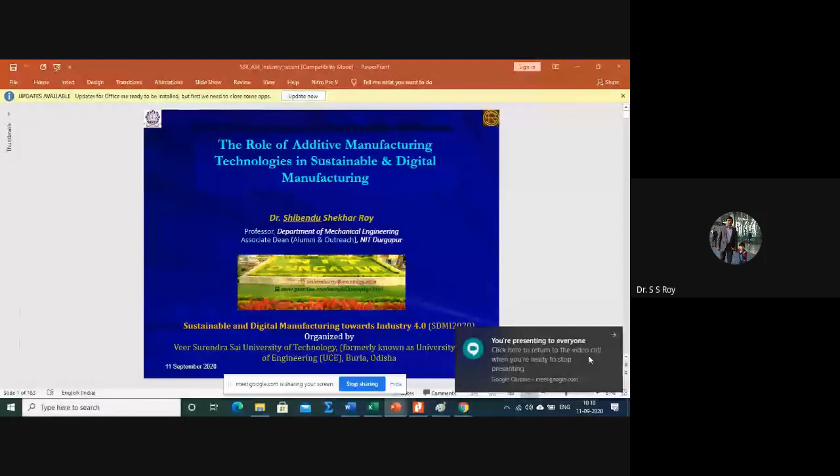I'd like to talk about the role of additive manufacturing technologies in sustainable and digital manufacturing in the area of Industry 4.0. As you know, the theme of this seminar is sustainable and digital manufacturing towards Industry 4.0, so I've structured my talk along this line, though I already know Professor S.K. Pal, who is also my teacher.

He already covered Industry 4.0 - what it is, why it is required, and what the challenges are. I'll just recapitulate that part, followed by what sustainable manufacturing is and what features sustainable manufacturing should have.

Then I'd like to talk about digital manufacturing, which was also covered by Mr. Mukesh in yesterday's afternoon session. My focus is on additive manufacturing - what role it plays in the arena of sustainable manufacturing as well as digital manufacturing.

We'll talk about what the technologies are, and more focus I'd like to give on some case studies and the research opportunities in this particular area.

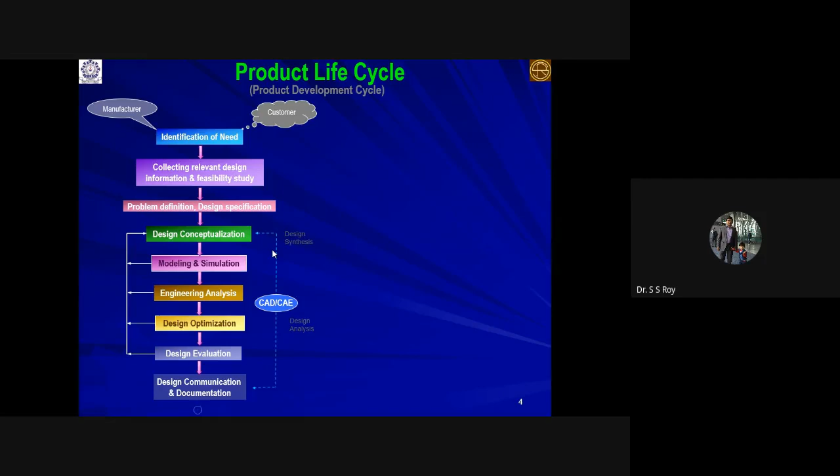Then design documentation. Once the design is over, we go for planning for manufacturing - process planning, capacity planning, manpower planning, material planning, and, important in the last 20-30 years, tool design. All these things have to be carried out.

After that, we go for the actual manufacturing. Once it has been manufactured, we go for testing, quality control, packaging, shipping, sales service, and after-sale service. So this, in a nutshell, is the product life cycle or product development cycle.

Now I'd like to emphasize that in each and every activity there is involvement of man, machine, and material.

As there is involvement of man, machine, and material, ultimately there is involvement of cost, whether it is manpower cost, machine cost, or material cost. Also, there is a time requirement for each and every activity. So the two critical factors are time as well as cost, though they are sometimes interrelated.

Now if you see any product development organization, they are facing some challenges. Even in the pre-COVID situation as well as the post-COVID situation, the challenge is we have to develop our product with the shortest possible time, with the lowest possible cost, but keeping quality as high as possible. It should be competitive from a quality point of view.

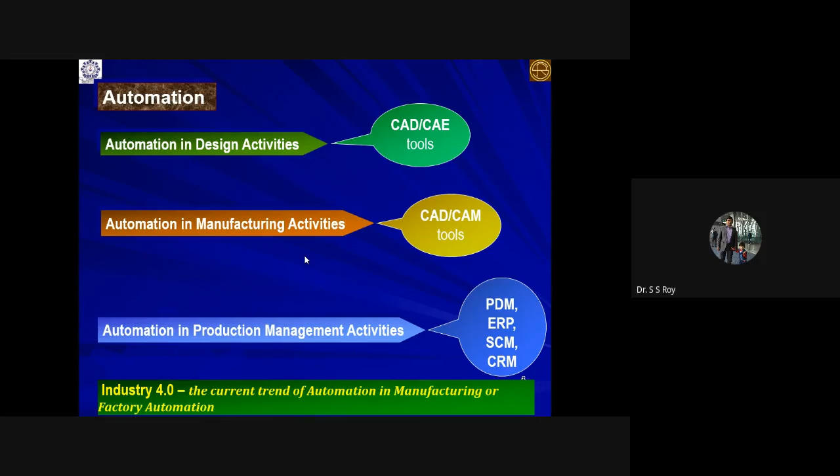And that is why, to make the factory much smarter than before, the current trend of automation in manufacturing has been coined as Industry 4.0. Now, as Professor Pal mentioned, if you see the industrial revolution, it starts with Industry 1.0, Industry 2.0, Industry 3.0, and so on.

I would like to show you the brief history of Industry 4.0. But before that, I would like to show you, in the current context, what Industry 4.0 is doing and what different technologies are used in Industry 4.0. So I'd like to show you this video. Please bear with me and listen carefully.

Here, the machine and product communicate with each other in the modern industry.

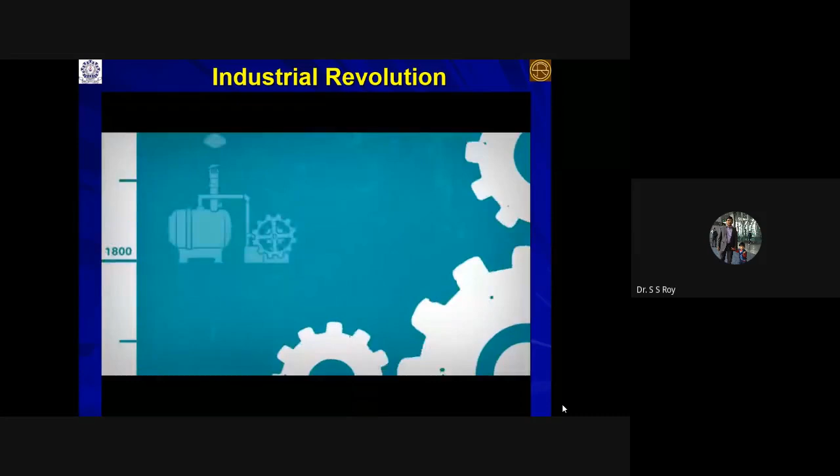So this is the history of the industrial revolution.

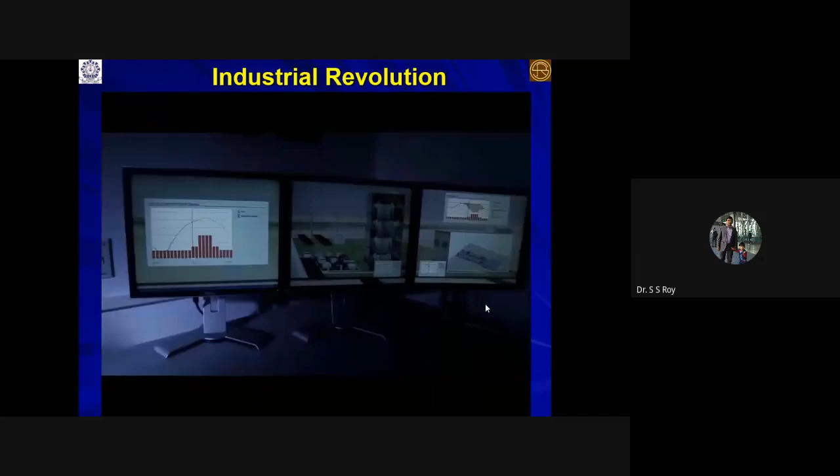So this is the way industry is moving. And as you know, the term Industry 4.0 was coined by the German government in the year 2011.

It is also known in the USA by the name smart factory. The German term refers to the trends of automation and data exchange in manufacturing, and the same thing is coined in the USA as a smart factory, which includes cyber physical systems, IoT, and cloud computing to make factories smarter than before.

So I would like to show you another view of that.

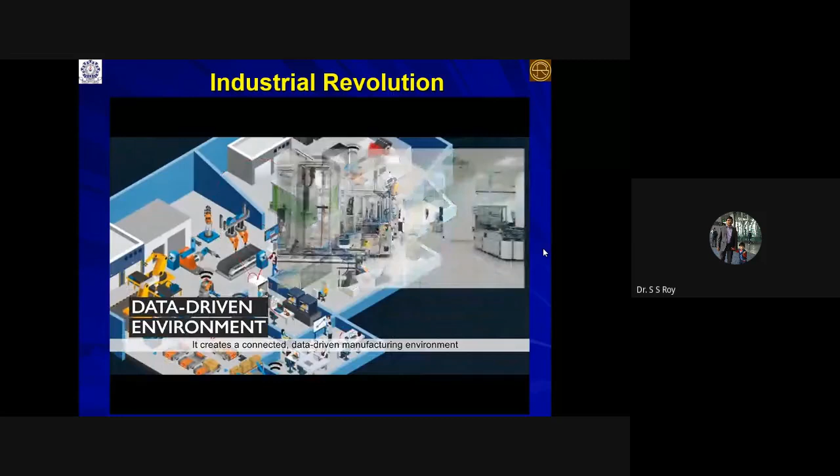So basically now it is a data driven manufacturing environment.

So this, in short, you can say is Industry 4.0. It is a combination of intelligent machinery, production and processes in a system that form a sophisticated interconnected network. In addition, it emphasizes the idea of coherence, digitization, and linkage of all productive units in an economy, creating real world virtualization in a large information system.

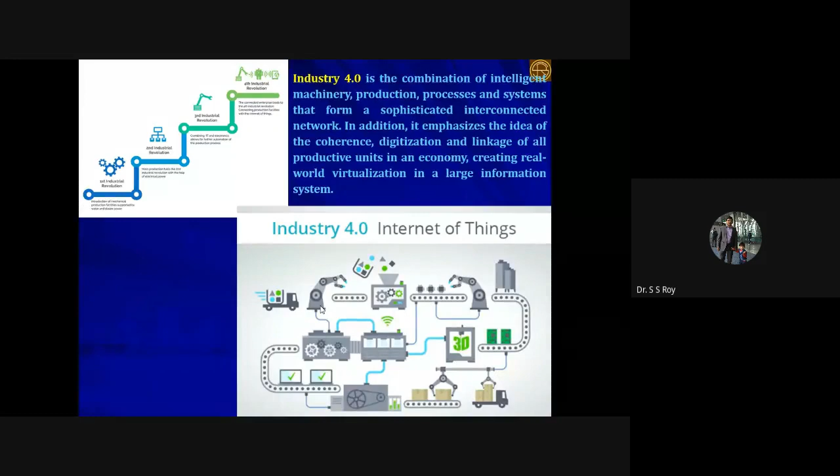Through this concept, it has the ability to collect information, share information, and use information to take better decisions and to improve productivity. So this is the main theme of Industry 4.0 - to make factories much smarter, and that is why it is also called the smart factory.

The elements that you already know include big data, analytics, cloud computing, autonomous robots, augmented reality. Here sensor technology is very useful - sensors, actuators. Without this, it's very difficult to implement at the hardware level.

System integration, industrial IoT, and in the core manufacturing sector, disruptive technologies like additive manufacturing are transforming industrial production in the arena of Industry 4.0.

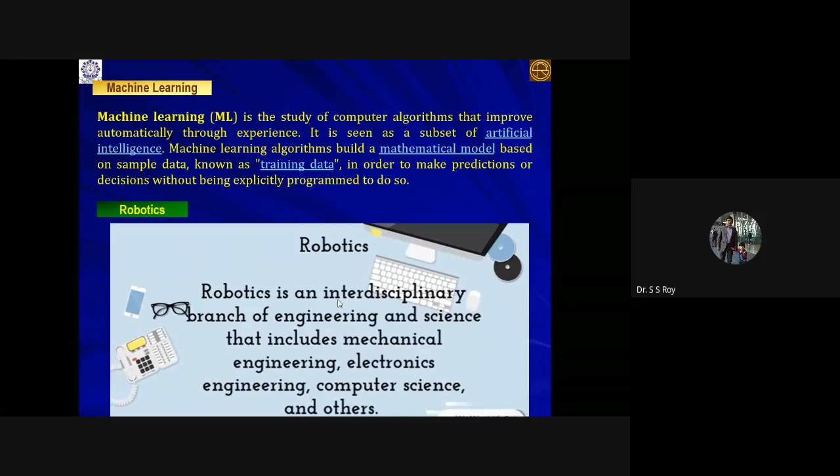So these are the different components that Professor Pal has already mentioned. I'd like to skip the individual component level and emphasize two things: one is the use of artificial intelligence and machine learning algorithms for autonomous robotics, and we have to design much more efficient or smarter robots to cater to industrial needs.

Artificial intelligence, sensor technology, and machine learning will be very useful technologies for Industry 4.0. If you look at the different technologies in Industry 4.0, though it is not restricted to a particular discipline, mechanical engineering and production engineering have a prominent role.

In this particular lecture, I'd like to focus more on additive manufacturing, where most of the disciplines are involved.

There is another concept called the Internet of Robotic Things. It is the concept where intelligent devices or robots can monitor - data fusion is required from varieties of sources, and ultimately the machine will talk with other machines to solve the problem.

The four basic principles in Industry 4.0 are interconnection, information transparency, technical assistance, and decentralized decision making.

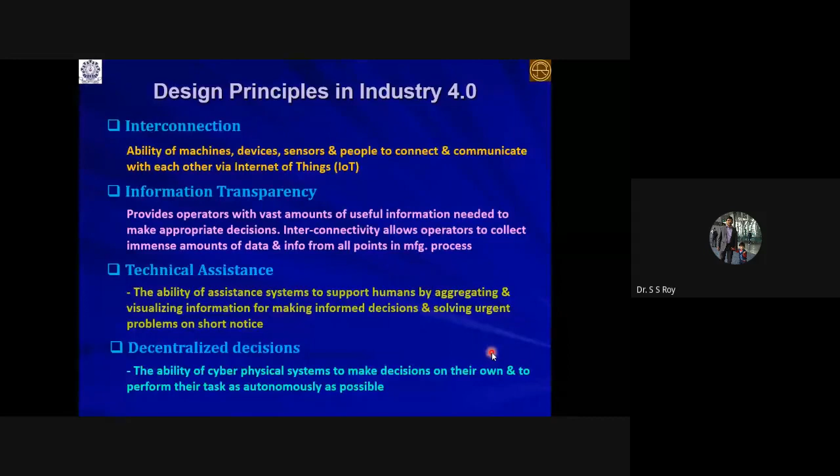Why Industry 4.0? Because it shortens the lead time or product life cycle time, and is cost effective and flexible. The benefits include improved productivity, enhanced customization - so mass customization is possible with this concept - improved worker safety and output, and you can access data across the supply chain for better decision making.

Major innovation in digital technology for automation provides significant benefit for the manufacturing sector and utility for consumers. That's why not only developed countries but factories in Indian industry are also trying to implement this concept, and it will be more important in the post-COVID situation.

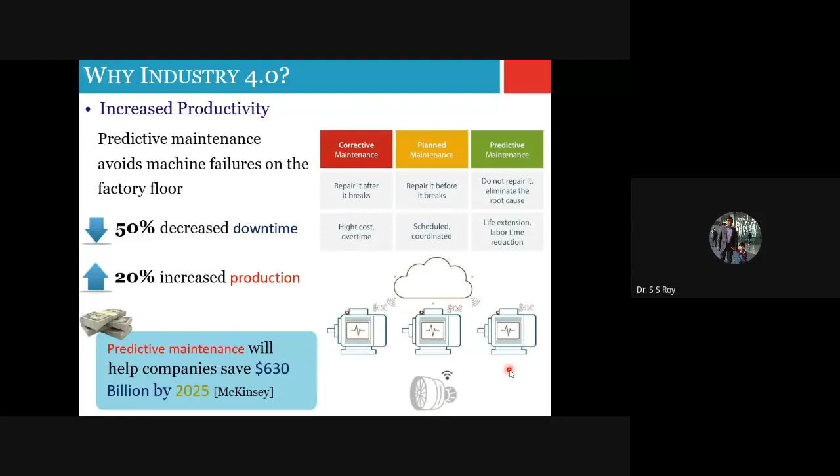As I mentioned, faster production - some case studies show speeding up the manufacturing process with better quality, and decreasing downtime by 50%. This is some case study that has been shown.

Improved decision making is possible because you can access data at any time from anywhere.

What are the challenges? There is still a lot of research to be carried out to solve technological challenges like communication, reliability, cyber security, and machine intelligence. Still, it is at the very beginning, the nascent stage.

A lot of maturity is required in handling big data, but it also has social impact because of general reluctance to change by stakeholders, and lack of adequate skill sets. People are thinking it will create unemployment, but that's not true, as Professor Pal already explained in yesterday's lecture.

In short, industrial production systems are being transformed due to the high level of digitization, which leads to intelligent, connected, and decentralized production. The core idea of Industry 4.0 is to use the emerging technologies we mentioned, the 9 technologies, in a way that business and engineering processes are deeply integrated, making production operate in a flexible, efficient, and sustainable way with constantly high quality product at low cost.

Now, sustainable manufacturing is important. It's basically defined as the integration of processes and systems capable of producing high quality products and services using less or more sustainable resources like energy and material, being safer for employees, customers, and surrounding people, and being able to mitigate environmental and social impact through its whole life cycle.

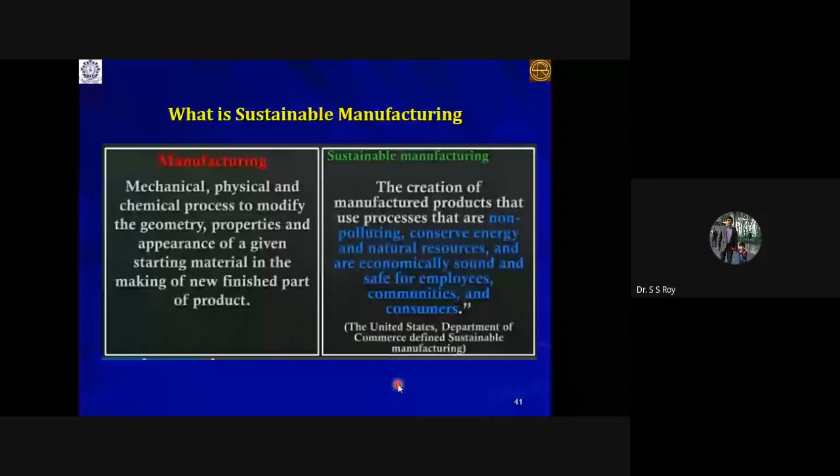Sustainable manufacturing processes are those which generate minimum quantity of wastage, demonstrating improved environmental performance and energy efficiency, while providing operational safety and personal health. These are the main features a manufacturing process should have to be called sustainable manufacturing, which is the branch of sustainability that deals with economical, environmental, and social objectives of manufacturing activity.

The three pillars of sustainability are the environment aspect, the economy, and the societal aspect. From the environment point of view, you use less energy, consume less natural resources to develop a product, and waste and emissions should be minimum.

From the economic point of view, it should also be viable, and from the societal aspect, there should be safety for employees, safety for common people, and it should respect human rights. If a manufacturing process complies with these aspects, we can call it sustainable in the long run.

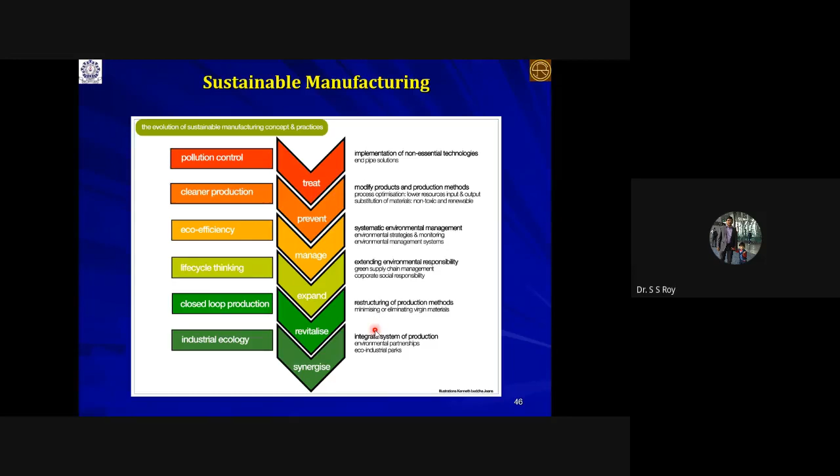So the key features I already mentioned: through this you can control pollution, cleaner production is possible, it should be eco-efficient, life cycle oriented, and nowadays it should also involve closed loop production, with industrial ecological balance, along with the 6R already mentioned.

It should be energy efficient, meaning energy or power consumption should be less. Waste will be minimum, and operational safety will be there, along with personal health caring, it should not be a health hazard. It should be environment friendly, and the manufacturing cost should be as low as possible. Only then can you call that manufacturing process sustainable.

There is a link between Industry 4.0 and sustainable manufacturing, because digitization and sustainability are common themes across all parts of the production chain. Both approaches present practices such as design for manufacturing, remanufacturing, recycling applied to life cycle management, reverse logistics for the circular economy, lean and green management for resource efficiency, and sustainable design reducing risks to the worker or consumer, eliminating the use of toxic parts in products and production processes.

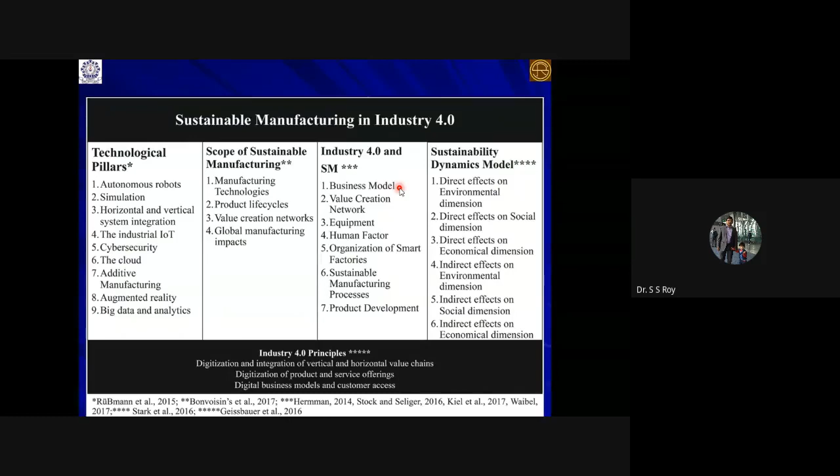Now come to the next important keyword, digital manufacturing. Digital manufacturing is nothing but an integrated approach centered around the application of digital systems or computer systems to manufacturing services and processes.

Digital manufacturing technologies started long back with product lifecycle management (PLM) tools and different intelligent algorithms for making a factory smarter. It is the technologies, linked systems and processes across all areas of production to create an integrated approach to manufacturing, from design to production to servicing of the final product. Digital manufacturing incorporates optimization capabilities to reduce time, reduce cost and improve efficiency of most processes.

There are many different tooling processes that digital manufacturing utilizes. However, every digital manufacturing process involves the use of computerized numerical control (CNC) machine tools. This technology is crucial in digital manufacturing as it not only enables mass production, mass customization and flexibility, but also provides links between the CAD model and the production.

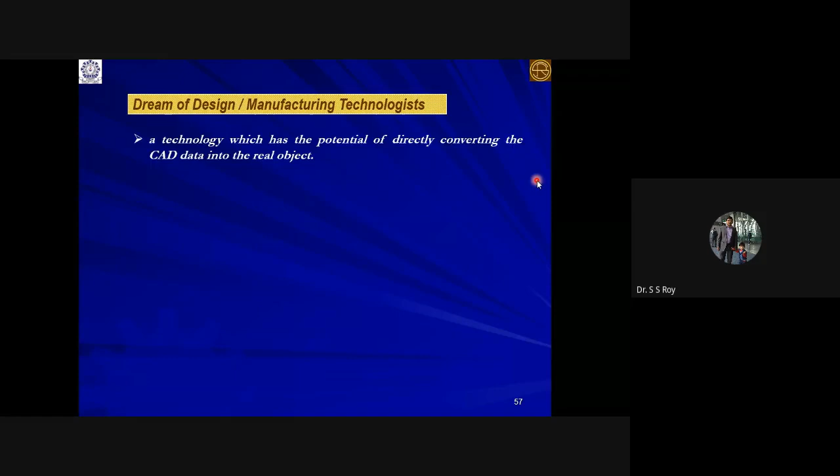Additive manufacturing is also known, as a nickname, as 3D printing. It is post industrial revolution. Once upon a time, it was a dream for design and manufacturing technologists to develop such a technology which has the potential of directly converting CAD data into a real object.

That is such a technology which provides the bridge from product conceptualization to product realization in a reasonably faster manner, meaning the rapid creation of a physical model to reduce the product development cycle. Now it is in reality, in the name of additive manufacturing. Additive manufacturing is the process of joining materials to create an object from 3D CAD model data.

Usually it is done layer upon layer - layer after layer material is added. That is why it is opposed to subtractive manufacturing methodologies.

The additive manufacturing process is very close to our nature. The way nature has manufactured many things - if you can see at the bank of a river, the soil is depositing layer after layer, and after adding years upon years, the soil layer is depositing, and after a few years you might see this type of island forming.

So the same principle is used in mechanical manufacturing by this additive manufacturing process. Similarly, in nature, plants and animals have been created by adding material - it may not be layer by layer, but by adding material, not by subtracting material.

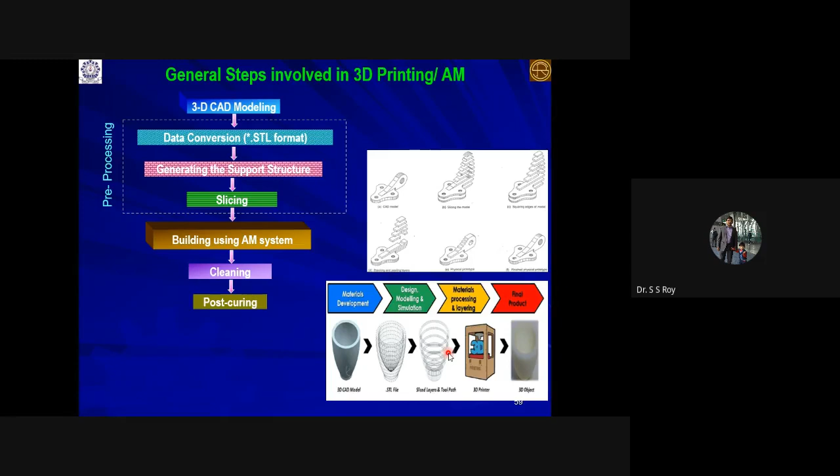Then some post operation is required, depending on which particular methodology is used - that I will explain in the next slide. It might be some post curing, in some cases post work finishing is required, and ultimately after post processing you will get a product which may be used as a component for the prototype, or in many cases as a pattern for a complex component.

But nowadays that limitation is not there - for a few cases you can use it as a functional part also. But one thing to keep in mind: when your product geometry is complex, that's when you get its benefit. If your product geometry is relatively simple and mass production is required, then it's better to go for traditional manufacturing process. But if customized product or mass customization is required, and if your geometry is complex, then you can get the efficiency of the additive manufacturing process.

Now additive manufacturing is also known by its nickname 3D printing, though the term 3D printing was coined by MIT for their product, but nowadays we loosely call all additive manufacturing processes 3D printing.

Now if you compare 2D printing with 3D printing - nowadays 4D printing is also there, but here I like to compare with respect to 2D printing and 3D printing. In 2D printing also, you have to develop the digital document either in Microsoft Word, Paint, PPT, or anything in MS Office.

So I'd like to show you some applications of additive manufacturing process. You can manufacture your own tool. It is also used for artwork. You can create any engineering prototype, architectural prototype for visualization, even cloth design, furniture design, machine component design, either for verification purposes or even in the biomedical sector. You can even manufacture your own robot by this method. So the possibilities are endless.

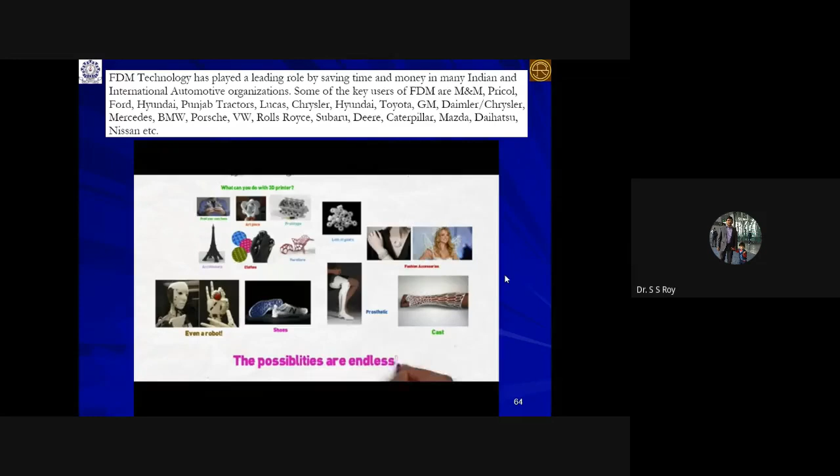Next I'd like to show you a few exciting applications of additive manufacturing, which were never before possible. This new technology can also reduce costs and decrease building times of daily use tools. So let's take a look at the best 3D printed creations. At number 10, the walking gyroscope. Invented back in 1981, the 3D printing world has brought back this really cool toy. It's built from several components and houses a spinning gyroscope which is geared to a pair of walking feet. You can even build your own, since the 3D model can be found on thingiverse.com.

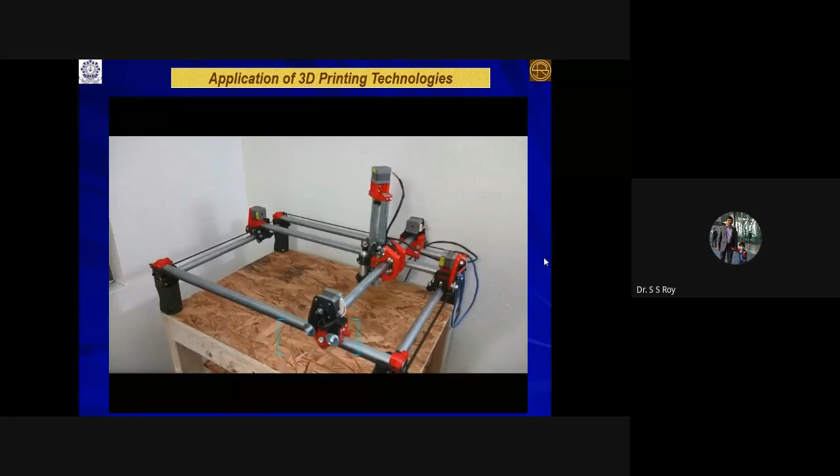That's number 9, a CNC multi-tool machine. Although it's not quite a 3D printer, this CNC machine is mostly made from 3D printed parts and is a lot cheaper than your average machine. It can work with woods, plastics, and even some metals. The components of this 3D printed CNC machine have been manufactured by additive manufacturing process.

At number 8, the Cortex. This is another interesting application. With this sort of plaster, there is no itching problem, and it is customer specific, custom made.

A 3D scan is taken, and then a fully custom 3D cast is printed out. This is definitely innovative and very beneficial to people who have to deal with an injury.

At number 7, the Dodecahedron speaker. With 3D printing on your side, building a complex speaker box becomes fairly easy to do. This 12 speaker array gives off great sound while being exponentially cheaper than some of its commercial counterparts. I expect to see and hear pretty cool 3D printed speaker housings in the near future.

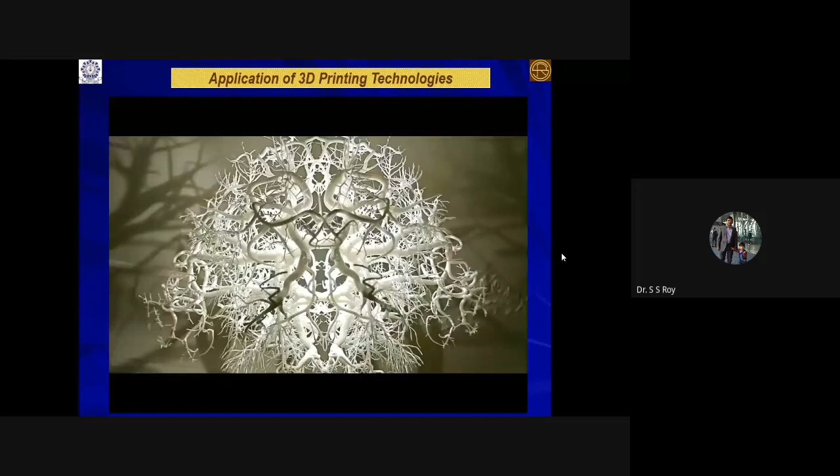At number 6, the Forms in Nature light sculpture. This unique light casts 360-degree shadows onto its surroundings, which gives the illusion of being in a forest. New custom 3D lights are being designed.

With traditional manufacturing processes, this complex thing is impossible to manufacture.

A four-cylinder engine that does not run on fuel like a real engine, but is actually a replica composed of many 3D printed parts. Built by Eric Harrell, you can visit Thingiverse.com and print your own replica engine, but it'll likely take you over 70 hours to print. Every part moves, and it's driven off an electric motor. If that's not crazy enough, the same creator even built replicas of a 5-speed transmission and a transfer case. That's pretty crazy.

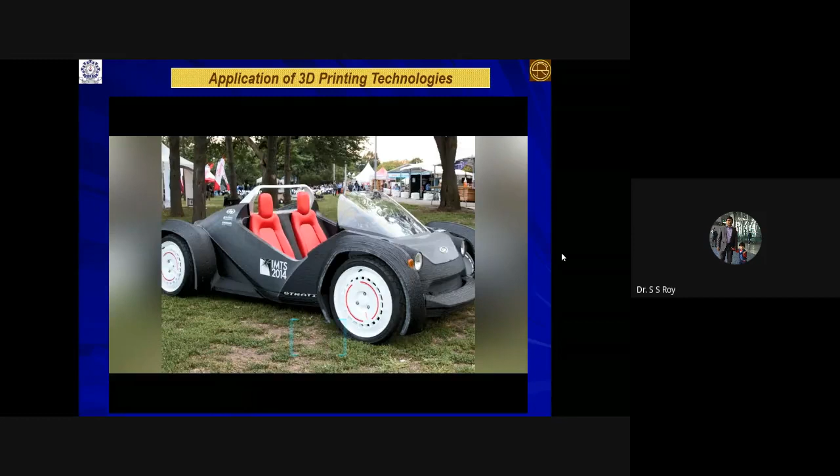At number 4, the Local Motors 3D printed car. Most of this car is composed of ABS plastic reinforced with carbon fiber. Its frame, exterior body, and interior features only take about 40 hours to be 3D printed. Its mechanical components, including battery, suspension, and brakes, are not 3D printed but are added on after. It's a fully electric car with a top speed of 50 miles per hour, and it's expected to be released next year. At number 3, a real 3D printed jet engine.

Metal 3D printing is used here. This new engine proves that 3D printing methods can cut costs and production times. Its creators are hoping to test fly a prototype within 10 months. If everything goes well, commercial certification will be awarded in the next 2 years. 3D metal printing is a fairly new thing, and it will not only improve engine building times for the aviation industry, but also for the automotive and marine sectors.

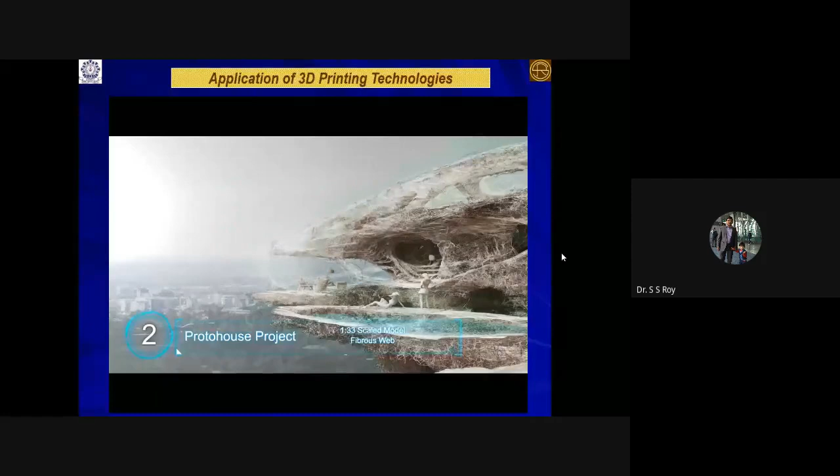At number 2, the Protohouse scale model. This project tested the boundaries of large-scale 3D printing and brought forth a very unique nest interlock style type of house. It might not be a house which everyone would want to live in, but Professor Pal already mentioned the use of additive manufacturing in building manufacturing and in civil engineering.

At number 1, a 6-story printed apartment building built in China by WinSun. This apartment is a 3D printed building, made of industrial waste along with quick drying cement, using recycled material. The building is 10 meters high and 40 meters long.

It fabricates components and then everything is put together on site. Steel reinforcement and insulation are then added in. So in this way, recycled material is used in 3D printing, decreasing labor costs by 80%. WinSun is also...

I would like to explain some working principles of the additive manufacturing process. From there you can see what the research opportunities are.

We'll start with a very simple one, the old one, that is the sheet lamination process, or laminated object manufacturing process, which according to the first way of classification belongs to the solid based RP system. The first commercial system, named LOM 1015, was developed by Helisys US in the year 1991. But this is not the first additive manufacturing process — that one I will show you next.

The material is a solid sheet coated with a heat activated adhesive, a thermoplastic adhesive. It can be paper, plastic, composite sheet, ceramic sheet, or even nowadays metal sheet. Layer thickness is 0.05 to 0.25 millimeter, and the process involves laser cutting and lamination by hot roller compression. Laser type is either CO2, and the laser power depends, typically 25 to 50 watts.

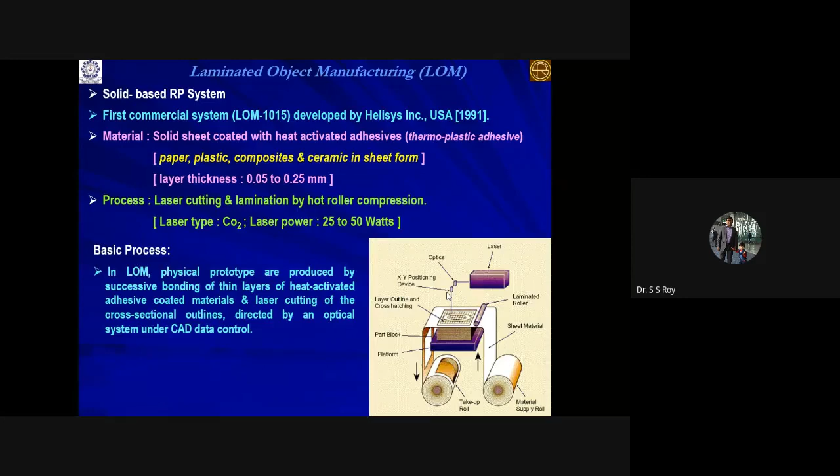The basic process is that physical prototypes are produced by successive bonding of thin layers of heat activated adhesive coated material or sheet, then laser cutting of the cross sectional outline according to the cross sectional information after slicing.

To do that, first you have to develop the 3D CAD model, which has to be saved in an STL format. No support structure is required in this case, and it will be sliced. Slicing means the cross sectional information is fed to the machine, and according to that cross sectional information, the machine works accordingly.

So in this particular machine, this is your material supply roll. You pull this material from here, and this is the building platform, which is lowered down and up. It's basically CNC controlled by a simple ball screw nut mechanism that moves the platform up and down.

Initially over the platform, a simple dummy paper is placed so that the platform will be safe. Over the dummy paper, this thermoactive adhesive sheet is there. Your thin sheet coated with the thermo or heat activated adhesive will be taken out from the material supply roll, pulled over that, and clipped with the take-up roll.

So from the block, the unwanted portion you have to remove. So though this material, this particular process, there is wastage of material, and that is why nowadays this particular process is obsolete. But it is a very simple way to explain the working principle, so that is why I have chosen this example. But nowadays this is obsolete because of the wastage of material.

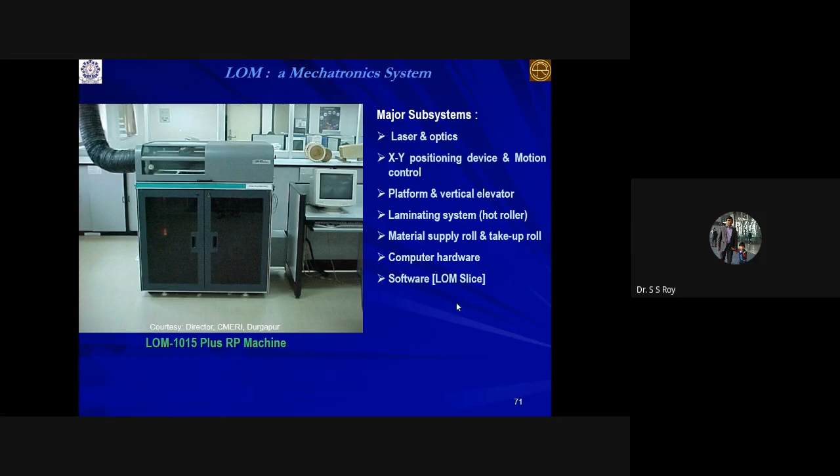Now, if you see from the mechanical point of view, the systems have the laser optics, XY positioning device and motion control, platform, the vertical elevator through the ball screw and nut mechanism, the lamination system like hot roller, material supply roll, take-up roll, and computer hardware, because CNC is basically computer numerical control.

And if you like to see the modern one, it's slightly different. It looks like our 2D printer.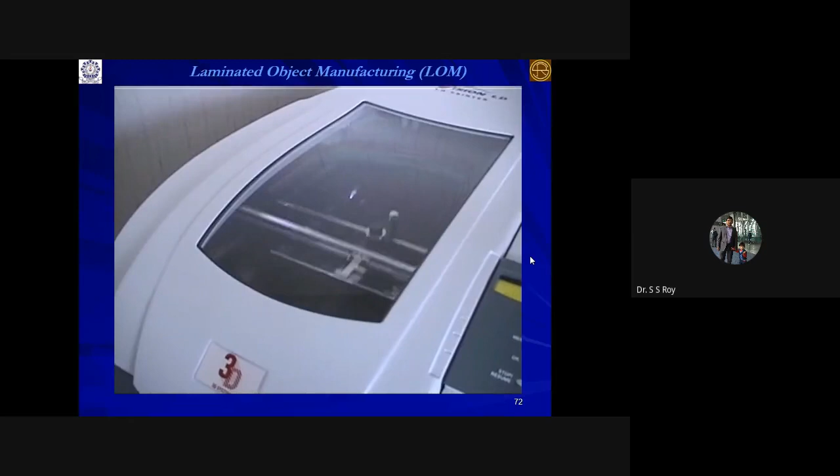Convert your 3D CAD designs into three-dimensional rigid plastic models that help you improve the speed, quality, effectiveness, and cost of your design projects. Its lightweight, compact design and quiet operation allows you to position the printer right in your office, even on your desk. The easy-to-use LDU software provides quick, easy setup to begin building your model. Building layer by layer until the model is complete, the InVision LD 3D printer uses proven operation to produce durable, rigid plastic models. Speed of the build is dependent on the size, number, and complexity of the models being built, but most parts can be built in just a few hours. When your model is complete, simply open the door and lift the model from the build area.

So in this case, a plastic sheet is used. Removing it, easy peels. Here also, same thing, there is a wastage of material.

So now I like to tell you about the first additive manufacturing machine in the world, developed by Professor Hull, who is also the founder of 3D Systems. The machine that you have seen here is the first additive manufacturing machine in the world, named the stereolithography apparatus. The method is photopolymerization, and it is based on resin or liquid resin.

So it is a liquid-based additive manufacturing process, first commercialized in the year 1988 by 3D Systems. The material used is photocurable resin, which may be epoxy resin or acrylate resin. The laser type is helium-cadmium or argon ion, and there is a movable platform.

The working principle is similar to the previous one, there is only one exception. So here you just see the vat is full of photocurable resin, and initially this particular platform will be at the top at this particular position. Its position has been controlled by CNC, numerical control, and the mechanism you see is the recirculating ball and nut mechanism.

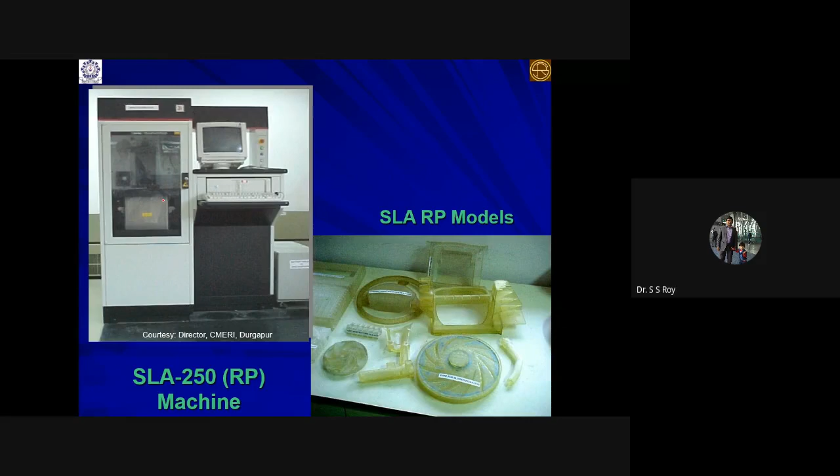And you just see this is the machine, which is one of the oldest machines. It was there in CMERI Durgapur, and now it is not in working condition, but it is one of the oldest machines in India as stereolithography, and these are the products developed using that particular machine.

So here I'd like to show you some videos of the stereolithography method. You just see the big machine.

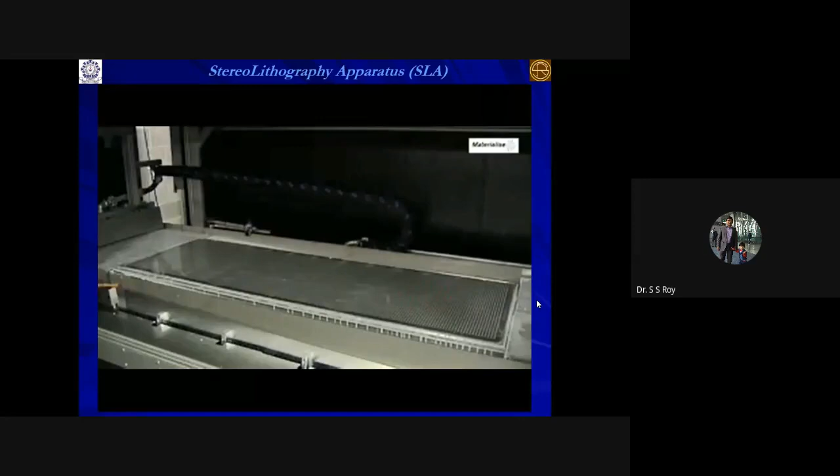Some pre-processing, or the process parameter - the very important thing, the process parameter. So for each process, there is a process parameter that has to be set. So these are the tracings of the laser according to the cross-sectional information.

After that the platform lowers down, and this is the wiping blade. It will basically uniformly distribute the second layer of the liquid resin, again tracing the path, and this process will continue till the top material comes, and after that the platform will move in the upward direction, so that whatever product has been built, that is not fully cured - it has somewhat 50% strength.

Now it has to undergo the post-curing operation under the closed ultraviolet chamber. So whatever product we get from the SLA, that strength is 50%, because it is not fully cured, it is partially cured. Now you have to do some post-curing operation under the closed UV chamber.

So these are the products created using the stereolithography apparatus. So from this you can see the usefulness of this particular methodology.

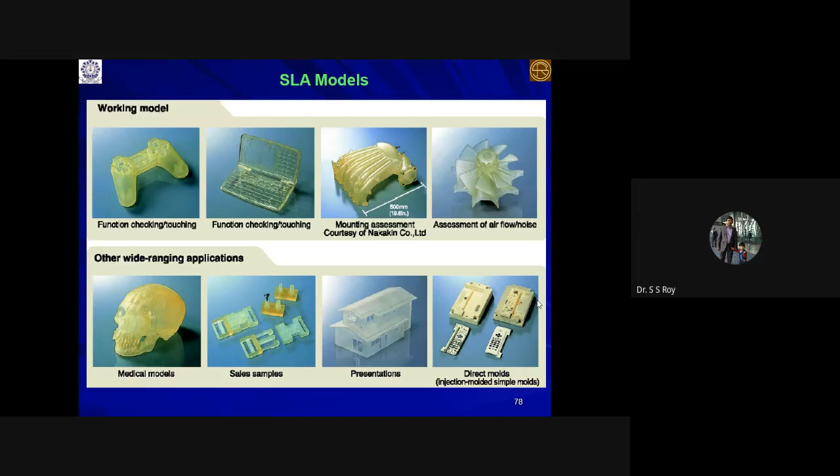It is called a solid-based RP system. It's a proprietary process basically, but the patent is already over. Now many companies are manufacturing this to make it low cost. So material used is ABS plastic or PLA or any other polyurethane elastomer. The basic process is same as the initial process.

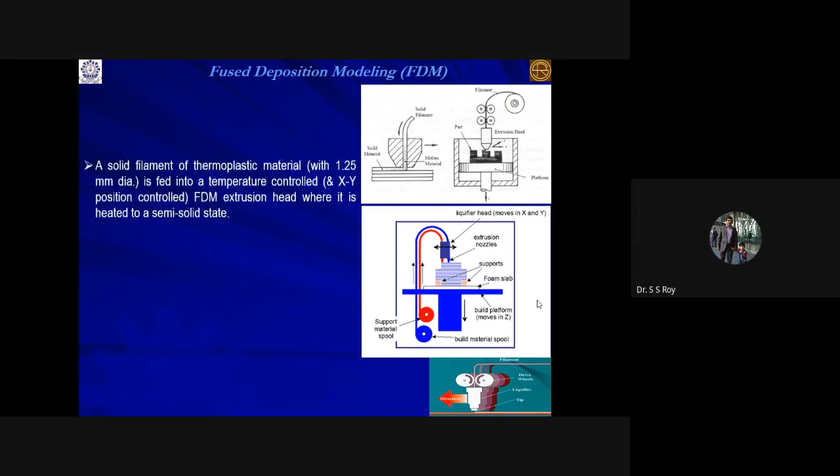First you have to develop the 3D CAD model, save into .stl format. In this case support structure is required. You have to create support structure, then you have to do slicing using proprietary software or any open source software. Now if you see the manufacturing process steps, it is basically somewhat mechanical. Here the input material is in the form of filament.

The input material is in the form of a filament of 1.25 millimeter diameter, made of PLA or ABS, and it is fed to the extrusion nozzle or extrusion head, which is both temperature controlled and position controlled.

The filament feeds through multiple rollers within the extrusion nozzle. As there is continuous flow of filament, it creates back pressure inside the nozzle. The nozzle is temperature controlled, set so that the solid filament becomes semi-solid. Because of the back pressure, it comes out through the nozzle diameter of 0.4 millimeter, so a very thin layer of semi-solid material is deposited.

Semi-solid material of 0.4 millimeter diameter is extruded through the precise nozzle and deposited in an ultra-thin layer on the platform. XY control is given to the head, and Z control is given to the platform. The platform lowers by a screw-nut mechanism, while the head moves in the XY plane by a rack-pinion or timing belt pulley mechanism. The extrusion head deposits material in the XY plane according to the cross-sectional information.

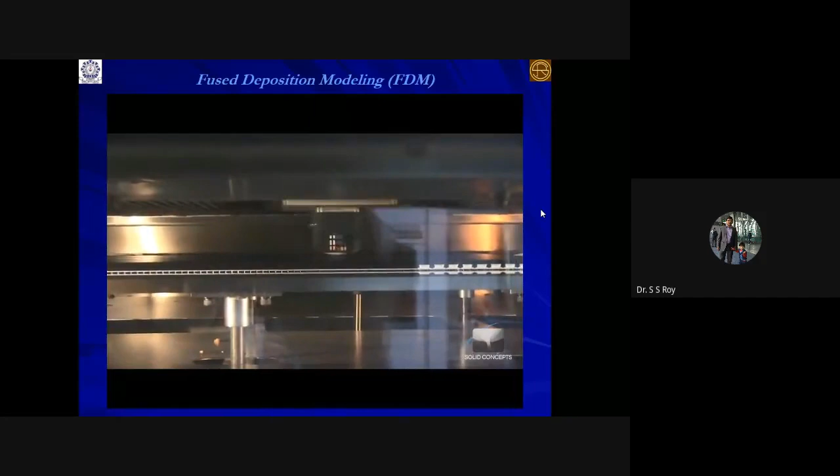Fused deposition modeling, or FDM, is a layer additive manufacturing process that uses production-grade thermoplastic materials to produce both prototype and end-use parts. This technology is known to accurately produce feature details and has an excellent strength-to-weight ratio. FDM is ideal for concept models, functional prototypes, manufacturing aids, and low-volume end-use parts.

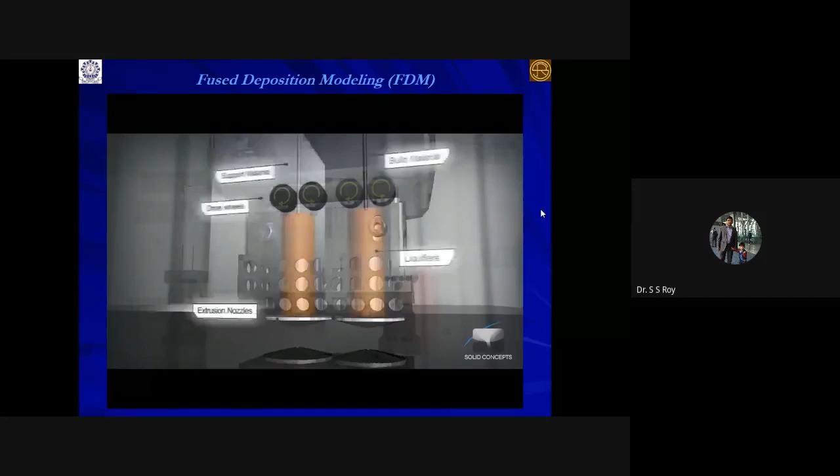The FDM process begins by slicing 3D CAD data into layers. The data is then transferred to a machine, which constructs the part layer by layer on a build platform. Thin thread-like spools of thermoplastic and support material are used to create each cross-section of the part. Similar to a hot melt glue gun, uncoiled material is slowly extruded through dual heated nozzles, which precisely lay down both support and thermoplastic material on the preceding layer.

Here the white color is the support material. If you see the structure of the support, it makes a honeycomb structure so that you can easily remove it, building the part layer by layer.

The finished part is removed from the build platform and cleaned of its support material. Raw FDM parts have visible layer lines. However, service providers such as Solid Concepts offer multiple finishing options to create smooth, even surface parts, including hand sanding.

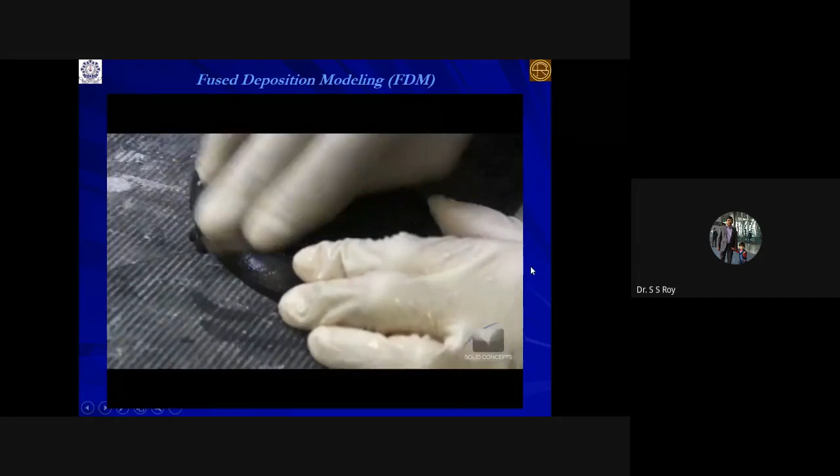Assembly and a post-curing operation has been shown here.

Sometimes this process is jokingly called similar to our jalebi making machine. The way we make jalebi is the same concept. The cloth is basically the nozzle, there is a hole, and we create back pressure with a finger, and semi-solid liquid comes out, and according to the XY movement of the hand, you get different geometries or cross sections. The same concept is used in FDM.

Now, the important thing for any manufacturing process is the process parameters. Process parameters are very important, and optimizing them is also important to make it sustainable.

The major process parameters for the FDM process are material viscosity, material flexural modulus, deposition speed, volumetric flow rate, tip diameter, envelope temperature, and horizontal width of the extruded material. These are the process parameters, and this is the product developed by the FDM process.

Next, the fourth methodology is the powder bed fusion methodology, and the first process is selective laser sintering, SLS. It is a very promising technique, a powder based system first commercialized by DTM in the USA. Materials used at that time included polycarbonate, nylon, wax, glass filled nylon, and powder coated metal and ceramic.

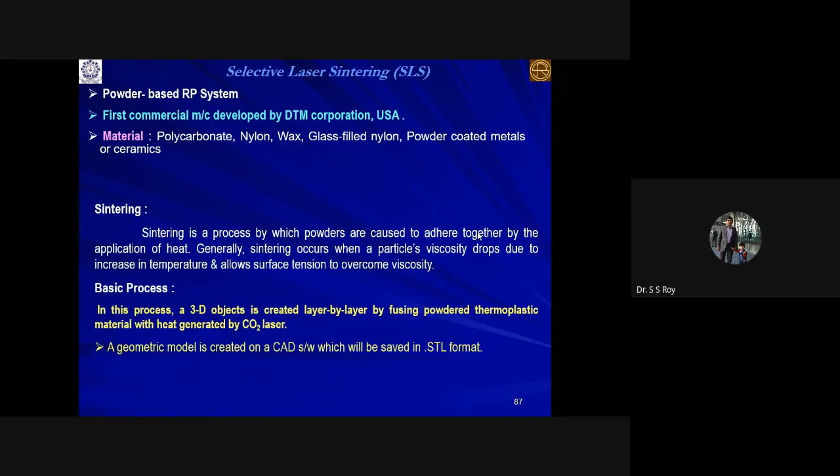The process is sintering. Sintering is the process by which powder particles are caused to adhere together by application of heat. Heat may be given by a laser here, and sintering occurs when particle viscosity drops due to increased temperature, allowing surface tension to overcome the viscosity. In this process, powdered thermoplastic material is fused and heat is generated by the laser.

A CO2 laser is used and the process is similar, but in this case one advantage is that no support structure is required. This is a major advantage of selective laser sintering - material wastage is minimum, even much lesser, and the powder is also reusable.

The process is similar to SLA. The only difference is that instead of a resin being sprayed over the layer on the platform, here it is powder.

It starts with a thin layer of heat-fusible preheated powder, as you see here on the platform. Above the powder there is a powder delivery system where powder is stored preheated, and the build platform. Initially the build platform is here, and over it powder is spread by means of a roller.

Now as one layer of powder has been sprayed, similar to the SLA process, the laser traces the path. In this case too, the path means not only the outer boundary - it also traces the inside, because due to the interaction of the laser and the powder, the material fuses and adheres. So full cross-sectional tracing is required.

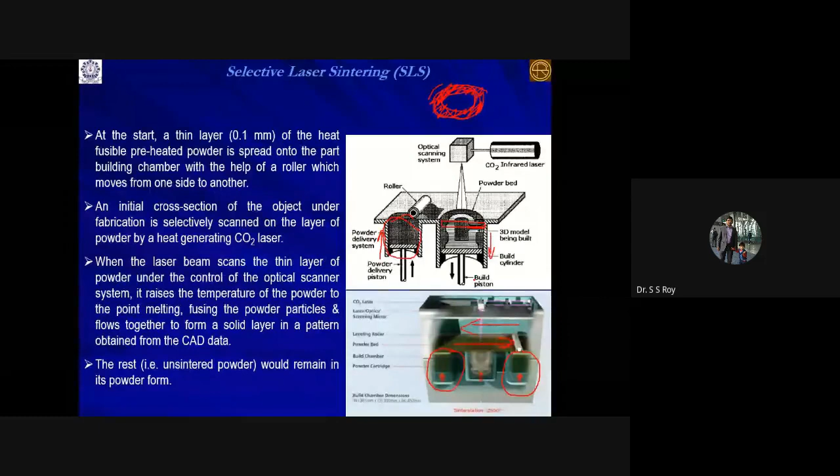The only difference between SLA and SLS is that in SLA there is a liquid resin, while in this case it is metal powder. Another difference is that the free powder acts as a support - you see overhang portions supported by free powder - so no extra support structure has to be designed, and the powder is also reusable. This is the major advantage: no support structure means no wasted material, and the powder is sometimes reusable.

That is why this is one of the most promising methods. Powder based additive manufacturing is more promising than others. So here I would like to show the DMLS.

The metal laser sinter, also known as direct metal laser sintering (DMLS), is used to manufacture the same component. This involves the interaction of the powder with the laser, which fuses it. It utilizes a variety of metal and alloy materials, such as stainless steel, cobalt chrome, and Inconel, to create strong, durable parts and prototypes. DMLS is an excellent choice for functional metal prototypes, high-temperature applications, and end-use parts.

The DMLS process begins in the same fashion as other layer additive manufacturing technologies. A program takes 3D CAD data. Once you slice the 3D CAD data, this type of cross-sectional information is stored into the CAD database, and that is fed to the machine so it knows exactly where to sinter the metal material.

The data is then transferred to the DMLS equipment, to a recoater assembly. The process involves spreading the powder, then laser tracing, again spreading the powder, laser tracing, and this continues as the built material is heated and fused.

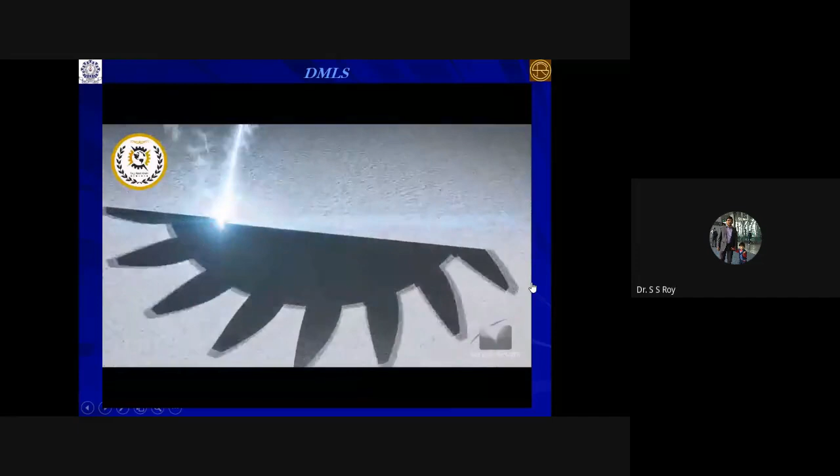Once a single layer is complete, the base plate is lowered just enough to make room for the next layer. More material is raised from the cartridge and recoated on the previously sintered layer. The DMLS machine continues to sinter layer upon layer, building from the bottom up.

As the part is built, support structures are added to give supplemental strength, and unused powder can be reused. The completed part is then removed from the base layer and treated with an age-hardening process to further harden it. Any support structures are also removed at this time.

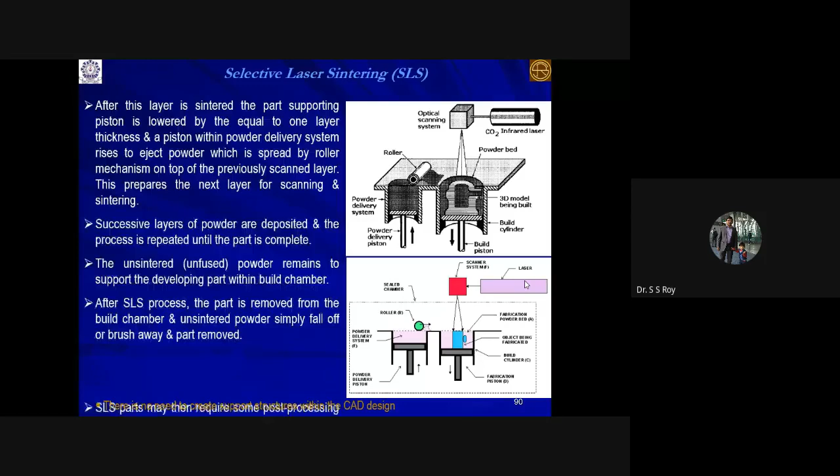Numerous surface treatment and hand polishing options are available through service providers such as Solid Concepts. These are the types of components that can be manufactured by the selective laser sintering process.

The fifth method I'd like to explain is the binder jetting principle. The difference between the previous method and this one is that both are powder based, but here instead of a laser you are depositing glue. It was developed by MIT and their product was named 3D printing. Nowadays all printers are considered 3D printers, but the actual name was coined by MIT Boston, and it has been licensed to many companies.

In this process, instead of a laser, we are depositing glue. Everything else remains the same: spreading the powder over the bed, then according to the cross-sectional information, the glue is deposited onto that particular cross-section and it adheres the material.

Once one layer is complete, the platform is lowered down. A second layer of powder is spread, and then glue is deposited from a tiny nozzle. The nozzle used here is the same as an inkjet printing nozzle, except instead of injecting ink, it injects glue.

The first machine, commercialized by Z Corp initially, has now been taken over by 3D Systems. You can see the printer head used here is the general inkjet printing head used in this case, with XY movement and a powder bed, shown in white.

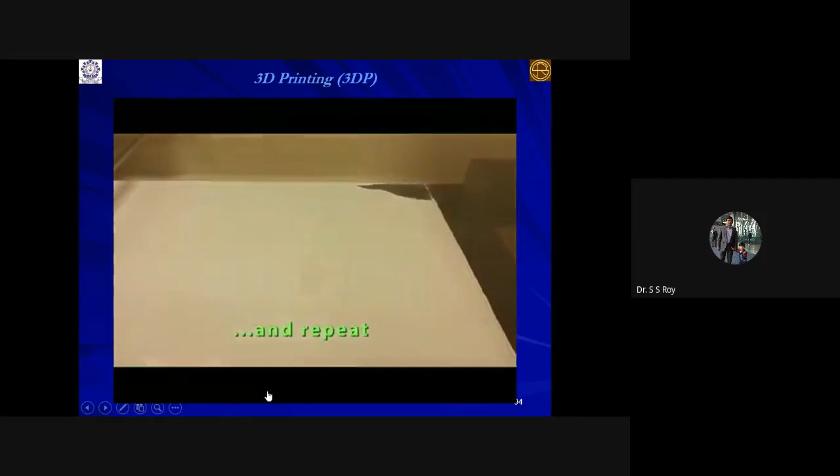This binder jetting principle is nowadays promising in biomedical engineering and also in casting. I'd like to show some examples. It's a very promising process.

It is the cold powder based additive manufacturing process.

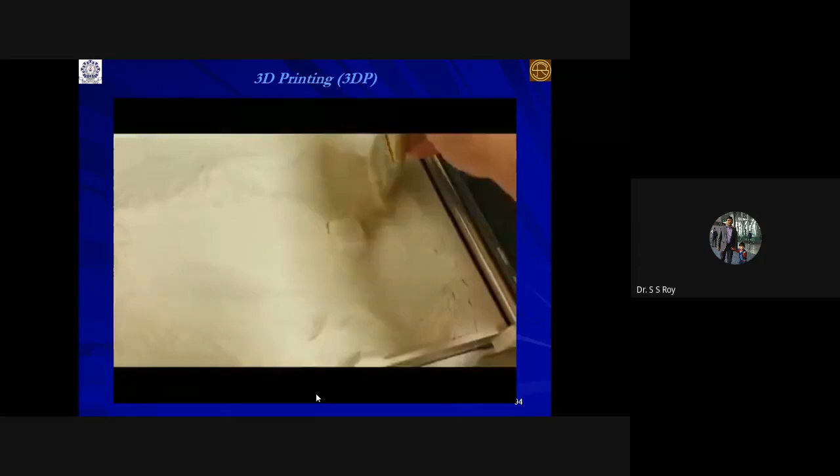In this case also, no support structure is required, which is beneficial because wastage of material is less. If you manufacture by traditional manufacturing processes or other additive manufacturing processes that require support structures, there is wastage of natural resources. But in this case, the wastage is less.

Now I'd like to show you an example based on this principle in mechanical engineering: casting is very important, and you can treat this as a patternless casting process, which results in huge savings of natural resources. Normally the pattern is manufactured from wood, and if you can eliminate that particular pattern-making process, it is a huge advantage in terms of saving natural resources.

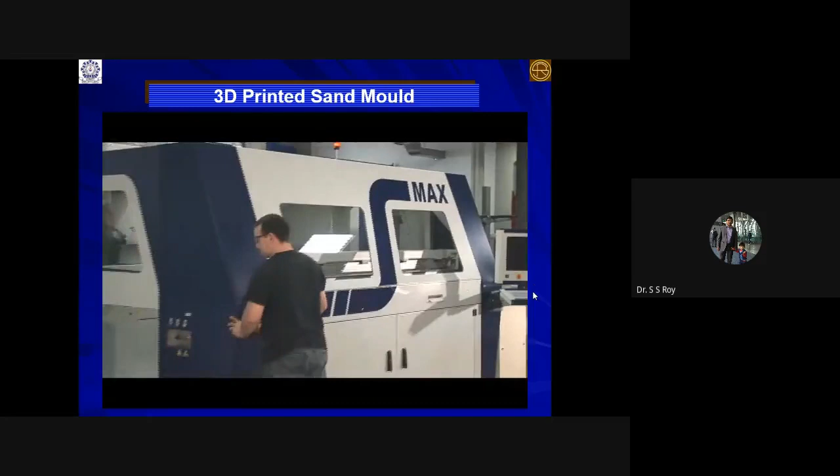The print process starts. See here, it is depositing the glue. This is the print head, consisting of a nozzle, and glue will be deposited over the sand bed. Sand powder has been sprayed here.

This has been done according to the cross-sectional information. Now it is spreading the sand powder over the previously glued layer. Spreading of sand powder. Now again, according to the second layer cross-sectional information, the glue is deposited from the tiny nozzle. See the colored deposition, that is the glue actually.

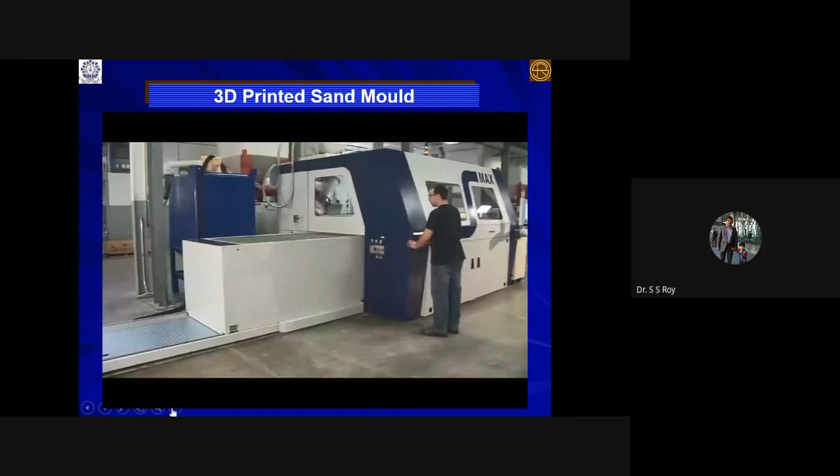Once the process is over, layer after layer adding the glue, the unwanted sand powder is collected by vacuum. Now see, this is your mold. For the casting process, the mold has been printed. Printed mold, this one, sand mold, printed sand mold.

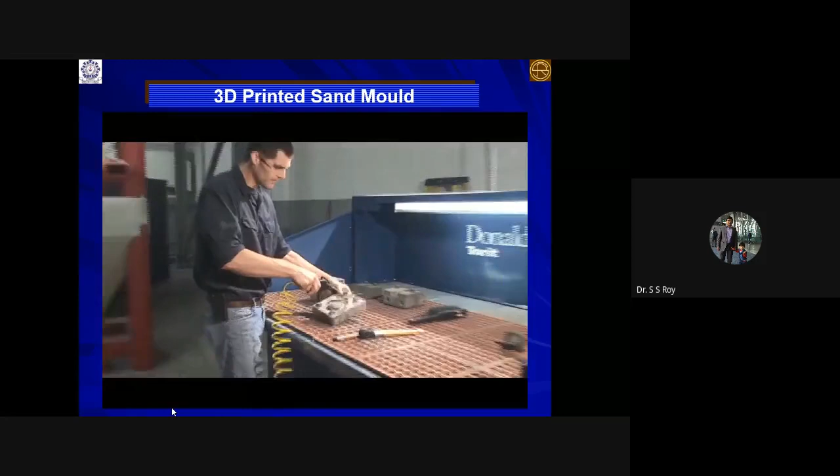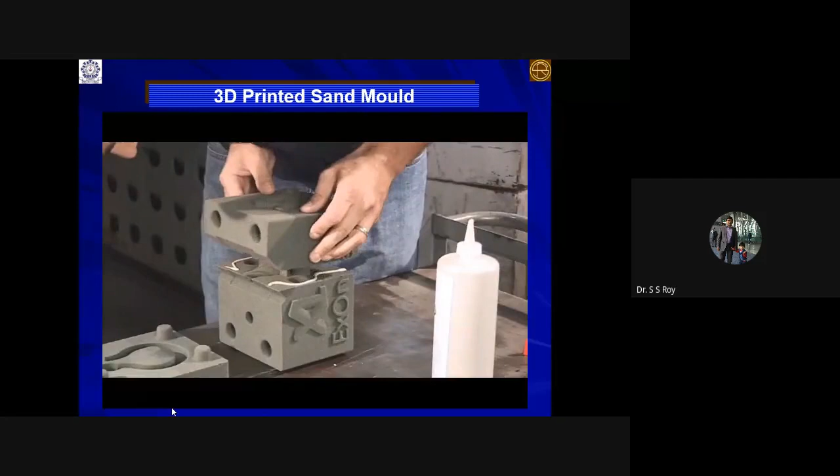So post-curing operation has to be carried out. In this way, the sand mold has been printed. Now pouring the material and casting.

The next methodology is material jetting. It's the same as binder jetting, but except here there is no powder bed. The material by which the product is manufactured is directly jetted over the platform, and the platform is under UV control. Once it deposits, because of the UV control, it will solidify. The second layer deposits through the tiny nozzle, and this way it continues. Polyjet is an example of that, developed by Stratasys.

The last one is directed energy deposition. In this case, it's different from powder bed fusion. The difference here is a specially designed nozzle from the center of which the laser passes, and a concentric circular slot is there from which the powder comes out. At the tip of this nozzle, the laser meets with the powder, and because of the interaction, it fuses and deposits the material. The molten or droplet form material deposits over the platform, or it can also be used for repair purposes.

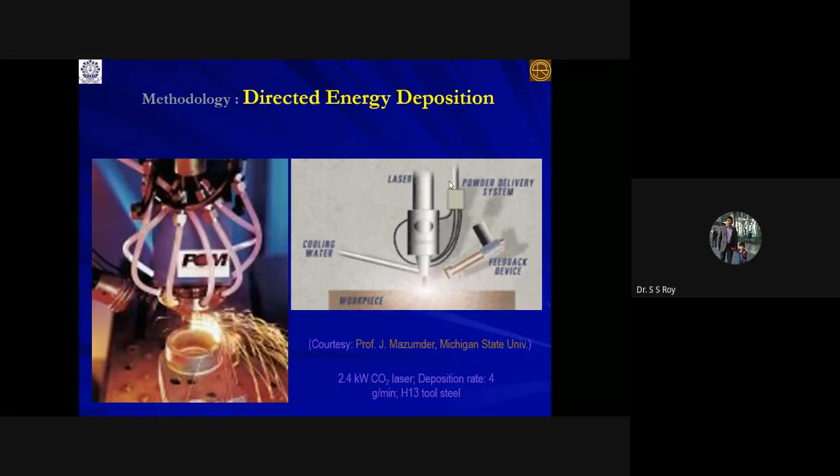As it doesn't depend on the powder bed, if you attach this sort of thing over robotic manipulators, then it has control in X, Y, Z, as well as orientation about X, about Y, and about Z. Six degrees of freedom, up to this you can achieve.

So this is the schematic diagram. Centrally, this is the laser beam, and you can see the nozzle is specially designed, with the powder fed from here, and at the tip, the laser as well as the powder meet, fuse, and deposit.

The example I'd like to show here is that robots are also used in 3D printing. Though the principle is fused deposition, not DMD, the same concept is used for DMD also. Robotic 3D printing, these are examples of that. For big objects, you can use what is called a Gantry kind of robot, or an articulated robot for 3D printing.

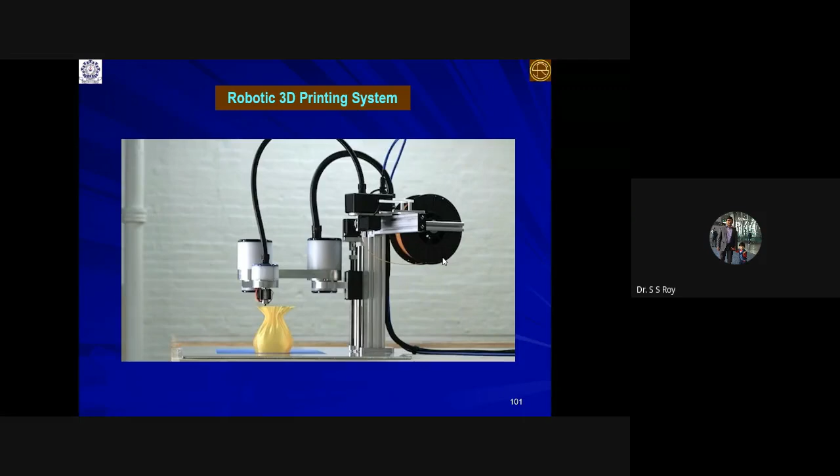So this is another new area of additive manufacturing and robotic technology, and both are elements of Industry 4.0. Now let's see which way it could be sustainable.

For example, in new product development, suppose a researcher develops the concept of an innovative turbine blade with a complex shape. Based on the design, the carpenter or pattern maker makes the pattern. The traditional manufacturing process works this way: the pattern maker makes the pattern, then the mold maker, based on the wooden pattern, creates the mold. In both cases human skill is required, then casting, then finishing operation to get the final part.

In this particular process, you see the wastage. Pattern making causes natural resource wastage, mold making with sand is also natural resource wastage. After casting, there are runners and risers you have to cut out and finish, again material is wasted. But instead of that, if material science and additive manufacturing advance properly, then there are two more routes.

One route I have already shown, where you directly print the mold using the binder jetting principle, the previous sand mold, the 3D printed sand mold.

In that particular route, you can at least save the material used for the pattern, and save time and cost both. This is the first route: directly print the mold, then cast. The second route, instead of creating the pattern and molding, you can directly print this particular cross section.

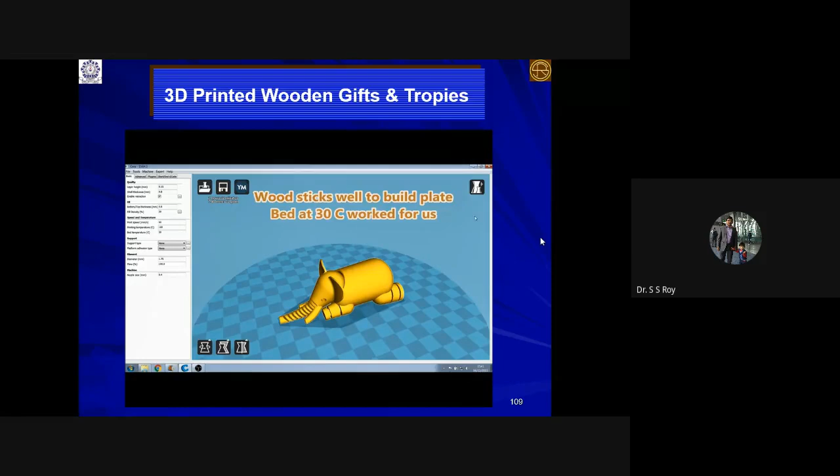I'd like to show this example. You can understand how you can make it lightweight by making inside a honeycomb structure or any other lattice structure. Though this is a 3D printed wooden gift using wood dust filament, the same concept design you can use for engineering products also to make it lighter, while keeping the strength and stiffness aspects the same. You can make it lighter.

See, inside is the honeycomb structure. In some cases you can use the lattice structure also to make it more lighter.

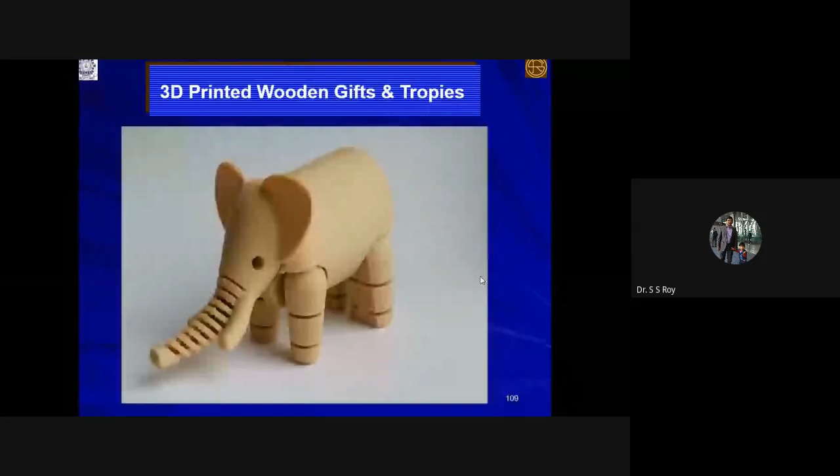I'd like to skip the 3D printing part. It is also used in jewelries for pattern making, and it is also used in food industries.

But another promising area of additive manufacturing is bioprinting, or the application of additive manufacturing in the biomedical sector, where mass customization is essential because it involves patient specific implant development. If you try to manufacture by the traditional manufacturing route, its cost will be high because of separate tools and dies needed for different patients.

But if you use additive manufacturing, it can make a customized or patient specific implant by taking their image, the MRI image of that particular bone or any other part or organ of the human being, and it can create a huge impact in this particular area also.

Now I'd like to show you one of my areas of research interest, which is additive manufacturing at the micro and nano scale, and there you can understand what the future scope is. So the additive manufacturing process is...

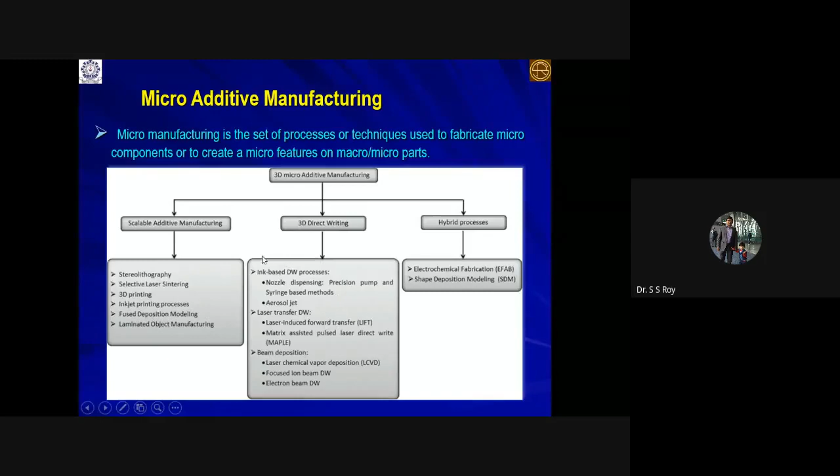Now here, one micro additive manufacturing process - inkjet printing - is used nowadays for MEMS sensor development, because it is also used in order to implement Industry 4.0 sensor technology, which is very important along with the actuator - smart actuator and smart sensor. That might be MEMS based, manufactured by additive manufacturing, because it saves a lot of costly material.

The sensors and actuators are made of relatively costly material, and if you use the traditional MEMS manufacturing process, it will be somewhat subtractive - there is wastage of material. That is why in developed countries they have switched over to the additive manufacturing process for MEMS device manufacturing, for micro sensor development, display device fabrication, TFT fabrication.

So they have switched over to additive micro additive manufacturing process, mostly in USA, Korea, Japan. They extensively use the additive manufacturing process, more specifically the inkjet printing process, for this particular flexible electronics and sensor area.

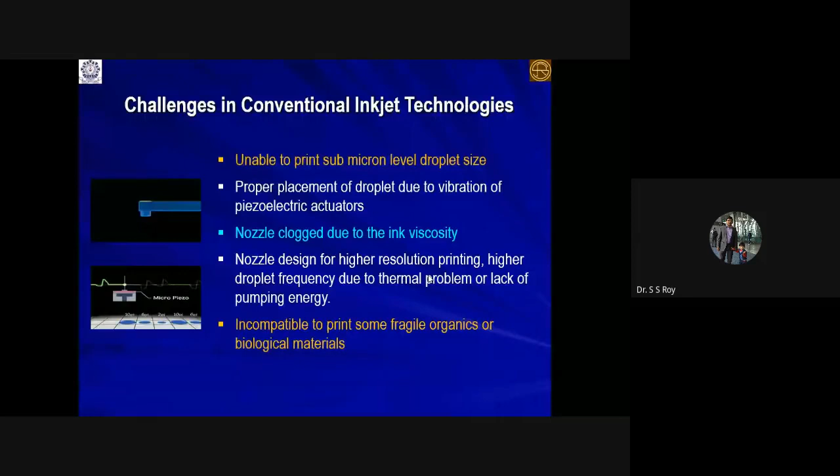So that is why if you like to create a micron level droplet size, the nozzle output diameter has to be lesser than that - then only can you create that droplet, because the droplet size is higher. If it is pushed, the droplet diameter is higher than the nozzle diameter, and there may be some clogging problem, and that is why the electrohydrodynamic principle is used in inkjetting.

Here we create a potential difference between the nozzle and the substrate platform. Because of this potential difference, it will pull the material in and form the Taylor cone here. At the end of the Taylor cone, the droplet is formed.

Droplet will not form from the nozzle end. Rather, because of the electric field, it will pull the ink, and because of this pulling, there are some fluid mechanics phenomena. Because of that, the Taylor cone forms, and at the end of the Taylor cone the droplet forms. Since the Taylor cone is the liquid part, the droplet forms at its end, and that is why the droplet size is much lesser than the inkjet or nozzle size.

So that is because an external electric field has been used, and that is one of the promising areas in the micro and nano additive manufacturing process - the electrohydrodynamic inkjet printing process.

And these are the setups we have developed under the DST project, in collaboration between NIT Durgapur and CSIR-CMERI Durgapur. In this particular DST sponsored project, we have developed the experimental setup of the electrohydrodynamic inkjet.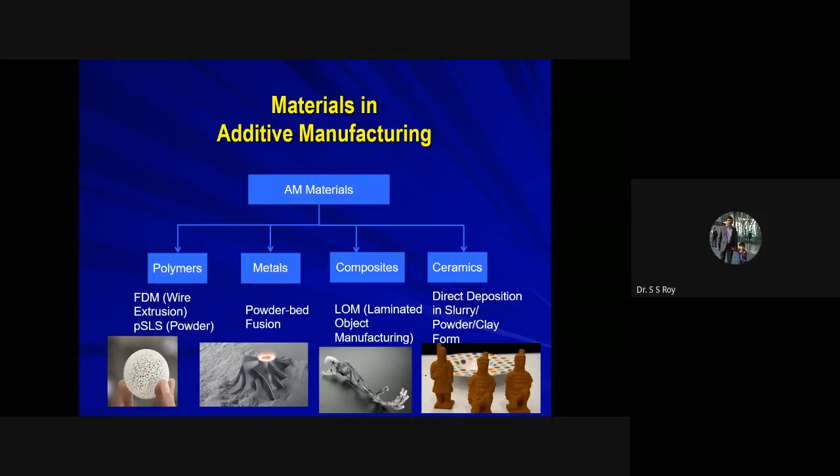Most micro and additive manufacturing machines are not equipped with real-time sensor-based monitoring and feedback control systems, so that has to be an open research area. Material limitation is there too. Till date, the materials used are polymer, metal, composite, and ceramic. As you know, there is still a limitation in materials for additive manufacturing, and research is going on in that particular area.

Different metallic powders have been used; these are the options. Polymer is extensively used - ABS, PLA, nylon, polyurethane rubber are also used. Some ceramic materials are nowadays used either in powder form, slurry form, or even in sheet form.

Laser-based metal additive manufacturing is nowadays developed by many companies. Biocompatible material is used for biomedical applications, but there is still a long way to go to achieve proper strength as well as surface finish through the additive manufacturing process. So these are research areas where researchers can focus.

Functionally graded material is another important area, possible very easily by additive manufacturing process. That is another promising area in additive manufacturing - to deposit material to make functionally graded material, meaning material property changes from layer to layer. This unique capability can be used not only at macro level but at micro and nano level also, which may not be possible by traditional manufacturing process.

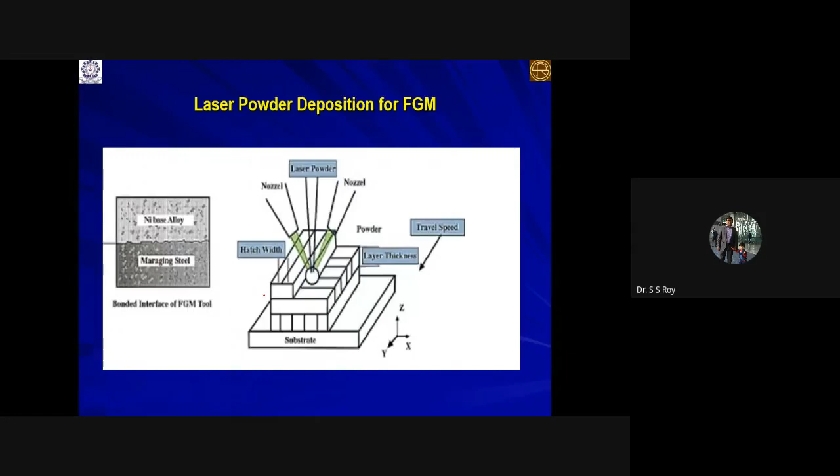As mentioned, geometric complexity is not at all a problem in case of additive manufacturing process. That is a major advantage with respect to traditional manufacturing process, and that is the novel aspect. Geometrical complexity is not at all a problem - it is easily achievable, and it will be more effective when your geometry is complex.

The capability of optimized geometry and creating lightweight components reduces material consumption, manufacturing, and energy consumption in use, which will be the prime factor in making the process sustainable. Additive manufacturing beats any other manufacturing process in terms of material consumption and ultimately weight, because you can create lattice structures and honeycomb structures to make it stronger and stiffer. As you know from strength of materials, if you distribute material at the furthest distance from the neutral axis, it will have more strength as well as more stiffness.

This is possible by topological optimization of your product, and that can be manufactured. Topologically optimized designs can be easily manufactured by additive manufacturing process, but that might be difficult in case of traditional manufacturing. There are some limitations in additive manufacturing, but this is the advantage - if you can improve material property and strength, it will be sustainable in the long run. Small batches of customized products are economically attractive relative to the traditional mass production process.

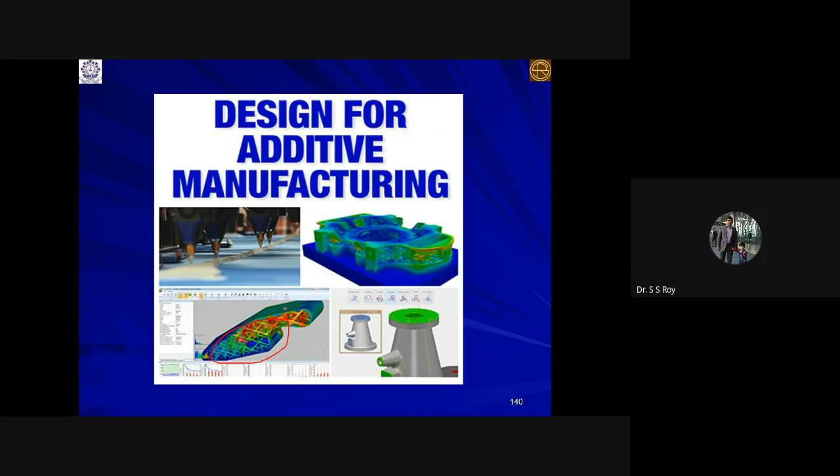Design for additive manufacturing is a very promising area. You know a lattice structure can be designed inside to give much more strength and stiffness while weight is less. So the case study I'd like to show is, for example, the seat belt clamp used in aircraft. Instead of metal, if you manufacture it with composite material using 3D printing with this kind of design, you can consolidate 8 components into one part, because geometric complexity is not at all a problem in additive manufacturing.

So it becomes 40% lighter and even 20% stronger using composite material properly. This 3D printed seat belt bracket is one concept I like to show for design for additive manufacturing, which reduces weight. The objective of any aircraft component is to reduce weight so fuel economy improves, and ultimately this design freedom enables carbon footprint reduction. This is the most important thing with respect to the environment, and for making the manufacturing system sustainable in the long run. Similarly, in the automobile sector, using topology optimization in design, you can make a lighter structure so fuel economy improves, again enabling carbon footprint reduction.

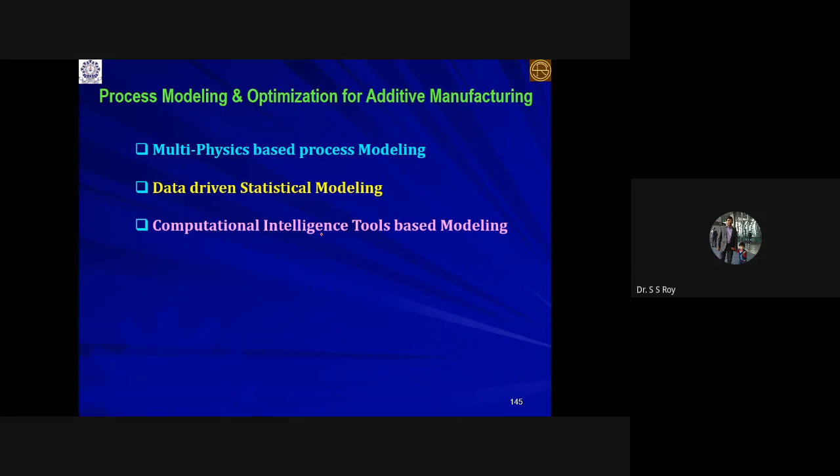Next, the second one is data-driven. Here, exhaustive experimentation has to be carried out. Sometimes it is a costly affair, but in some cases you can do it by this particular process—these are the modern, data-driven computational intelligence tools, also a data-driven modeling technique.

One such work we have done using artificial intelligence, both statistical methods as well as computational intelligence tools. For the FDM process, these are the input process parameters we have chosen, and this is the output response that we like to relate—that input-output mapping.

So these are the input parameters in respect of fused deposition modeling, like layer thickness, air gap, angle, orientation, width, and number of contours. We have tried to find out and build the relationship between the input parameter and the output parameter—that is called the forward mapping.

That you can do by statistical method or by soft computing or computational intelligence based methods. But another more important thing in practice is that in order to get this particular output, what should be the input? What should be the input setting? This is the reverse problem, or the inverse problem.

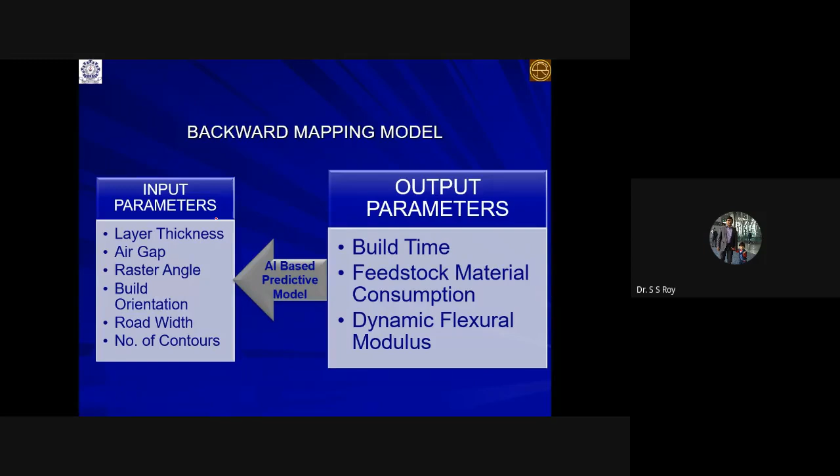So for forward mapping, we have used different neural network methods and adaptive neuro-fuzzy inference systems. But the important thing is backward mapping—in order to get this output parameter, what should be the input setting? For that modeling or mapping process, the computational intelligence tool will be more effective, and that we have carried out using the adaptive neuro-fuzzy inference system.

So he has reviewed the state of the art in respect of sustainable additive manufacturing, then societal aspect, environmental aspect like energy consumption point of view, design optimization point of view—all of this has been well documented through this review paper. I like to share this with those who are more interested in this particular area.